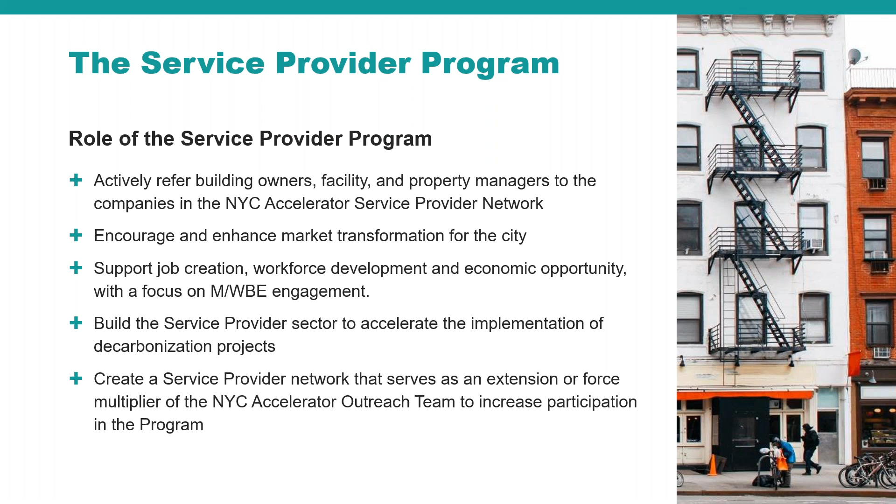One of the benefits to being a service provider with New York City Accelerator is you will get to grow your business through referrals from New York City Accelerator. As I mentioned earlier, referrals to building stakeholders are only for the service providers in our network. You'll also earn inclusion in the New York City Accelerator Service Provider Lookup Tool, which is shown here on this screen.

You'll also have access to our entire bench of account managers, expand skills, and grow your team. You'll also be invited to participate in New York City Accelerator's networking events and any trainings we hold, and we provide access to our financing and solar specialists. One of the things that isn't on this slide is we also provide our service providers with a full marketing toolkit and a financing toolkit.

So if you are a service provider and not yet part of the New York City Accelerator Service Provider Program, we would love to have you join us. Simply reach out to me. You can email me at denise@accelerator.nyc. I hold a virtual information session every Thursday at 11 a.m., and you can click on that link, or just email me again at denise@accelerator.nyc to express your interest, and I will send you a link and invite you to the virtual information session.

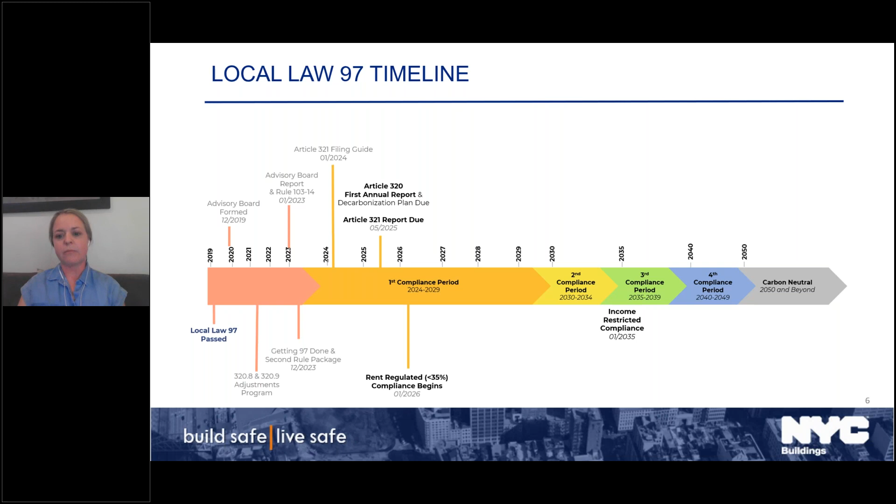So Local Law 97, like I was mentioning, is broken down into two compliance categories: Article 320 and Article 321. Article 320 is for most private sector buildings and certain affordable housing. Article 321 is for very specific types of affordable housing buildings and houses of worship. Today we're just going to talk about Article 320 and calculating the annual emissions and emission limits related to that article.

This is a little bit about the different compliance pathways for Article 320 that you see circled. These are the annual reports that need to be filed by May 1st every year, starting next year. It's approximately 34,000 buildings, and these are buildings that over time will have to get to carbon neutrality by 2050 and meet those emission limits that drop periodically every 5 years, that's the trajectory they'll have to maintain to stay in compliance.

Article 321, which we're not getting into today, that's a one-time report due next year. I think our next service provider training will focus on Article 321. I also want to mention that city buildings and NYCHA are still subject to Local Law 97 on a portfolio-wide basis. However, those buildings are not reported to DOB, and we don't have the oversight - that's with DCAS and NYCHA.

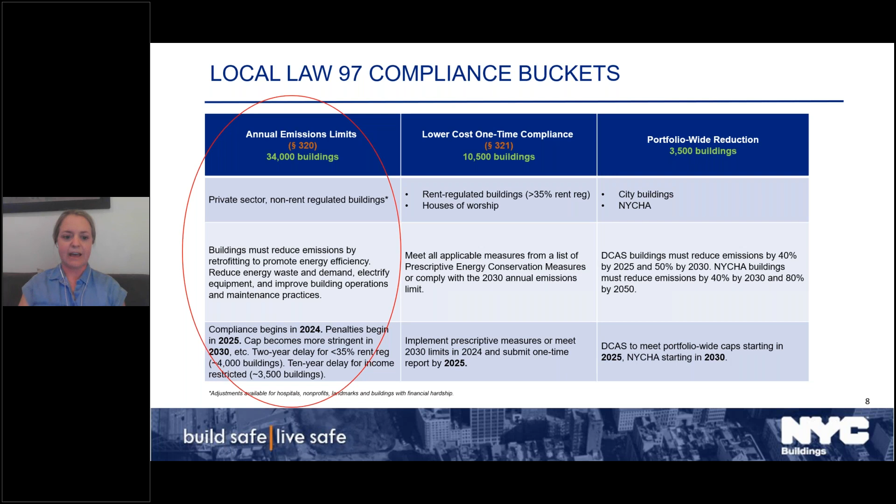I also wanted to mention that the historic sustainability laws - benchmarking, energy audits, and retro-commissioning - have been enforced on the lot level, at the BBL level. But Local Law 97, we're transitioning over to compliance on the building level, and that's important for a variety of reasons. A lot of the industry is used to reporting on the lot level, but this law is written differently, so we need to enforce it according to each building.

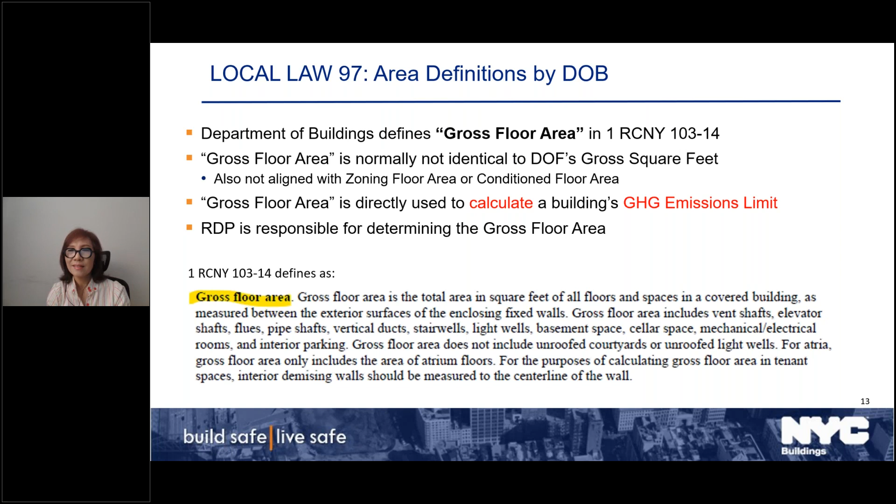So with that, I'm turning over this to... no, I have another scenario slide, sorry. Can I have the next one, please? Okay, so now let's take a look at the scenario.

So this scenario is: there are multiple buildings, actually 2 buildings, on the same tax lot, and they share energy service. By that we mean that the buildings share a meter or other point of connection to the energy supply or energy distribution system. If you look at the top diagram, 2 buildings are fed from one connection point for natural gas and also utility electricity. There may be one main meter for natural gas and some meters for electricity, but the connection point is basically the same.

In this case, on the same tax lot by the same owner, they share energy service and could submit a combined report only if building 1 and building 2 follow the same Local Law 97 compliance pathway. There was slide 9 earlier that Emily explained extensively - some buildings are subject to Article 321, and if this Article 321 building shares energy service with an Article 320 building, they cannot combine the report. Their reports have to be separate.

So it's only when building 1 and building 2 are both subject to Article 320 that they could submit a combined report. I said combined report, but the calculations still have to be at the BIN level, the building identification number level. So each individual building's energy use, their emissions over a year, and the emissions limit for a year have to be calculated separately.

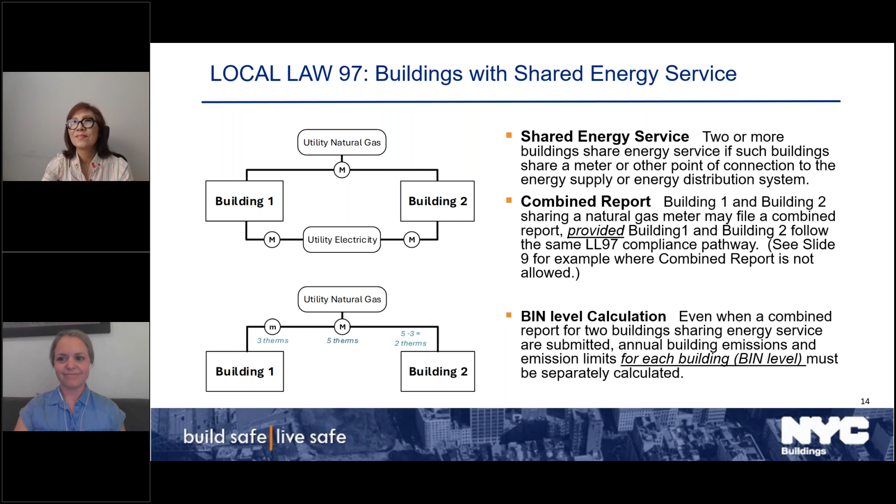Next slide. Okay, so Jean explained, we've set it up so far that I think it's understood that each building is required to generate their own emissions limit and figure out their annual GHG emissions. Again, we're talking about Article 320 buildings. So what you see on the screen are the calculations to do that, and we'll walk through each factor within these calculations so you're able to determine where that comes from.

So to determine the GHG emission limits in tons of carbon dioxide equivalent, the building will have to be broken down into Energy Star portfolio manager property types and the corresponding gross floor area of that property type. Jean explained what the definition of gross floor area is. It's not the same as Department of Finance's definition of gross square feet.

And in Rule 103-14, there's a corresponding emissions factor for each property type. So the building, when you're assessing a building, you break down each one of the property types by the gross floor area, and you multiply it by that emission factor that's either in the law or the rule. And you do that for each property type, you multiply them together, you add them up, and that's the emission limit for the building. So essentially every building will have a unique emissions limit because each building likely will not have the same gross floor area of each property type. So that's what we'll be seeing on the emission limit side.

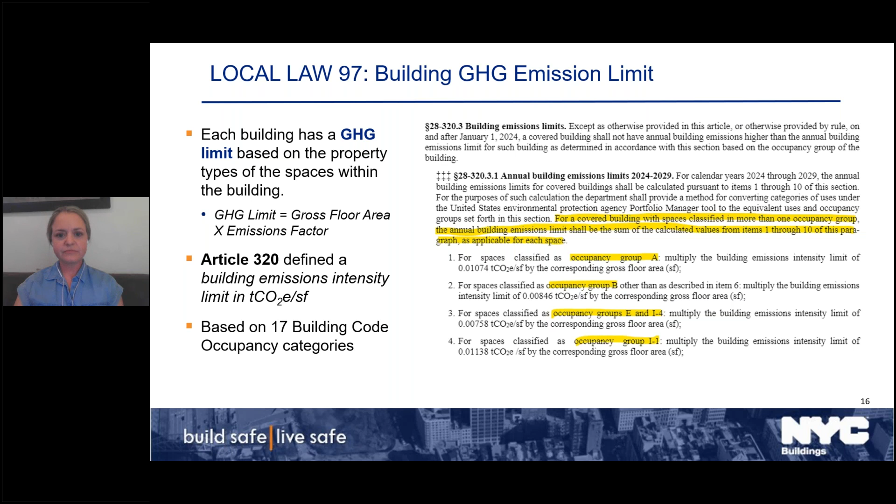In Rule 103-14, you'll see we have a list of Energy Star Portfolio Manager property types and the corresponding emissions factor for the different compliance years. Highlighted here is the first compliance period, years 2024 to 2029, with the associated emissions factors for each property type.

There are 62 Energy Star Portfolio Manager property types that correspond to the energy use intensity within the building. So when you're going through the building and breaking out the areas, it's important to think about the different energy use profiles of each space and assign them accordingly.

We'll go through an example later in this presentation. This is where it's important for the registered design professional doing this reporting to think about which property types make sense in a building and when they need to be specifically broken out.

If you're used to benchmarking reporting, benchmarking really wants you to classify an entire building—there are rules around when you classify an entire building under one single property type. Sometimes you can do two property types, but with Local Law 97, we're looking at a more granular approach, so it won't necessarily align with what's been reported for benchmarking.

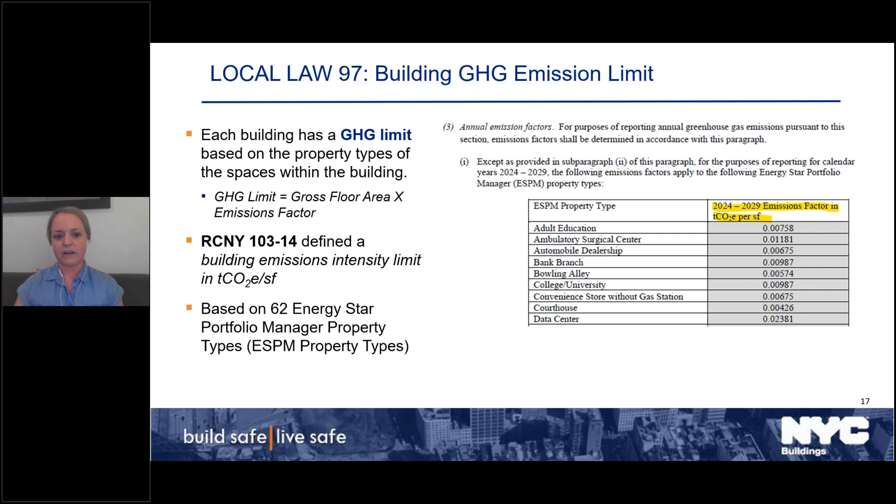If you're interested in how we did the research and the methodology for converting building occupancy categories into Energy Star Portfolio Manager property types, you can find a report on our website—there's a link under the image in these slides. You can link directly to that report. There were a lot of outside stakeholders involved; it was a very scientific methodology used to come up with those limits, and all of it was implemented in the first rule package effective January 2023.

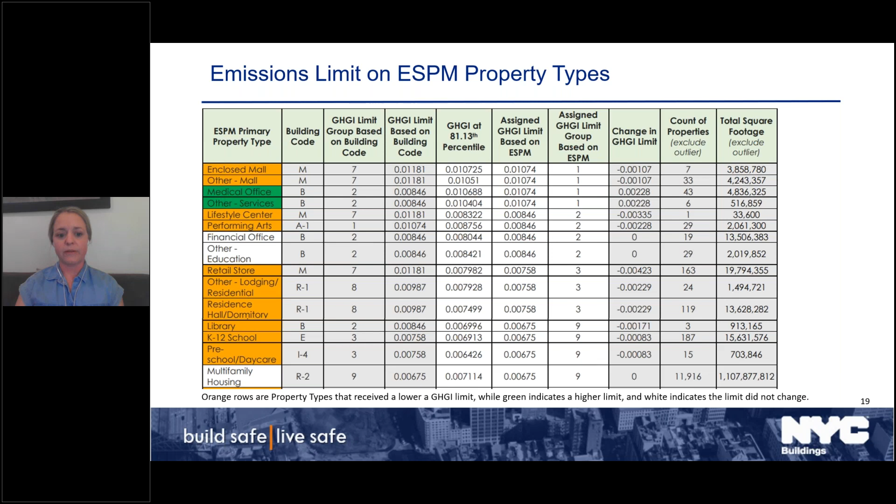So what do you do when we have two options—Article 320 building code occupancy categories and the ESPM property types? How do you know which one to use? We published a service notice in February 2023 that explains how you should approach it.

Basically, what we're highlighting is that in 103-14, you must use the ESPM property type limits to determine the building's limit rather than the occupancy groups. But there is one caveat.

The caveat is that most Energy Star Portfolio Manager property types, after the transition, have higher limits, meaning they're more lenient under this ESPM approach than the building code occupancy category. However, some buildings have lower limits, meaning they have a little more difficulty achieving compliance.

So only in cases where the emission limit was lowered under the Energy Star Portfolio Manager property type, buildings have the option to choose between the original law's building code occupancy category limits or the ESPM property limits. They have that choice only for the first two years. Starting with calendar year 2026, with reports due in 2027, all buildings must use the Energy Star Portfolio Manager coefficients.

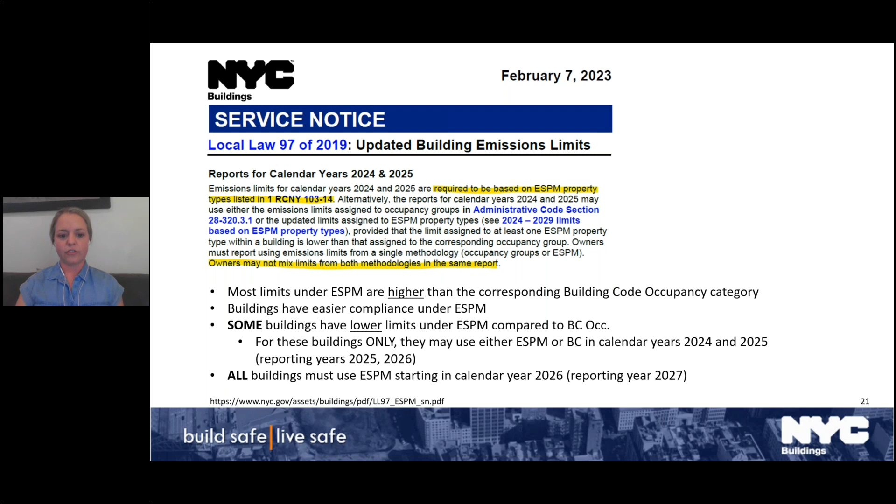This slide is just reiterating that starting calendar year 2026, reporting year 2027, all buildings must go with the ESPM property types that are listed in Rule 103-14.

I'm going to pass it off to Jean now to walk us through some examples. Thanks, Emily. Next slide, please.

So what does this mean? The metric tons of carbon dioxide equivalent - for instance, item number 1, utility electricity: 1 kilowatt hour of electricity consumption results in 0.000288962 metric tons of carbon dioxide equivalent emission. So that's what it means.

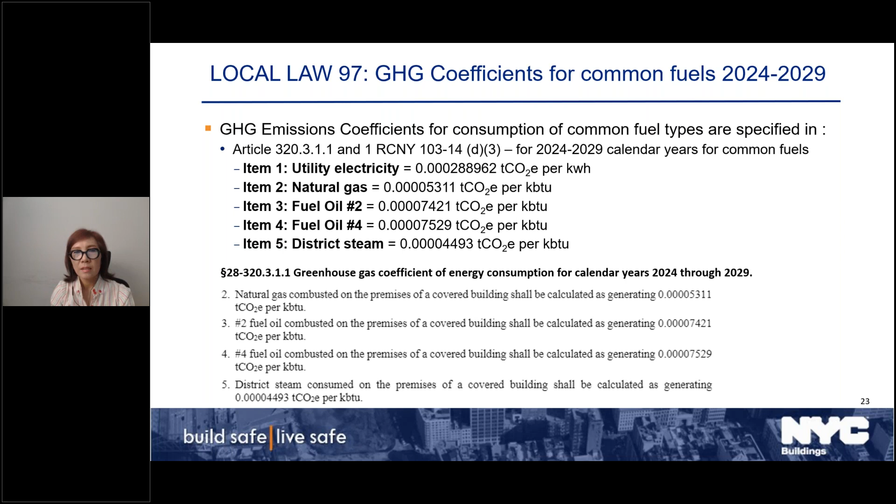Can we have a next slide, please? Emily has gone over this, so I will be brief. Buildings' annual greenhouse gas emission is basically the annual fuel use at the end of the year times the emissions coefficient of the fuel type. They have to add them all up per different fuel type, and that combined greenhouse gas emission is the building's annual greenhouse gas emissions.

The compliance period has started this year, so it's already end of June - we are currently 6 months into the first calendar year of Local Law 97. Local Law 84 benchmarking has the same covered building criteria of buildings over 25,000 square feet, whose annual fuel and water use have already been reported. So we are using the same annual fuel use data for Local Law 97. Can we have a next slide, please?

This is an example of what Emily explained and what I just talked about with the emissions coefficient. Let's take a look. This example is a multifamily commercial mixed-use building of 45,000 gross floor area - not gross square feet from DOF, it's gross floor area. To calculate this building's annual emission at the end of 2024, we look at their energy bill.

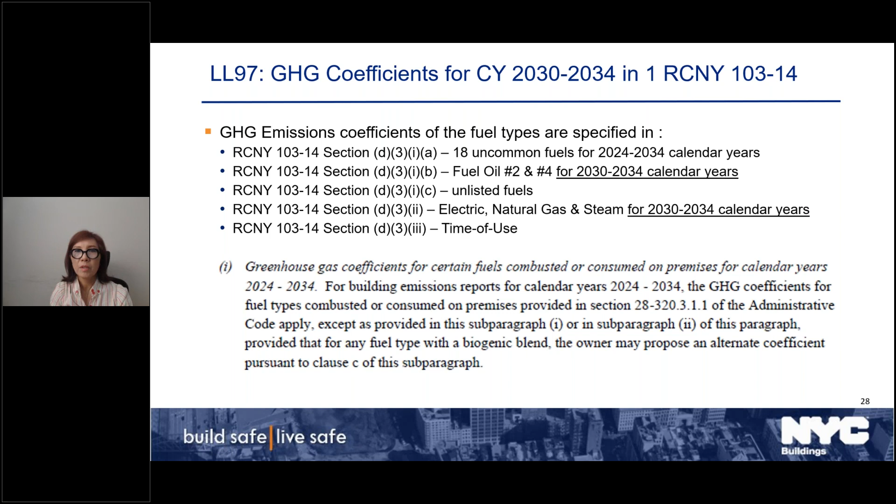Next slide, please. So to summarize, 70% of New York City electricity will be from renewable energy sources by 2030. And New York State aims to achieve 100% renewable electricity by 2040. And then Con Ed has its greenhouse gas reduction goals for district steam.

One thing that I forgot to mention, so there are things like offsite solar, community solar, energy storage, biofuels, and cogen systems. We have future rulemaking on the way right now, so be on the lookout for that. About this table, Emily probably will explain further with the chart in the next slide. Thank you.

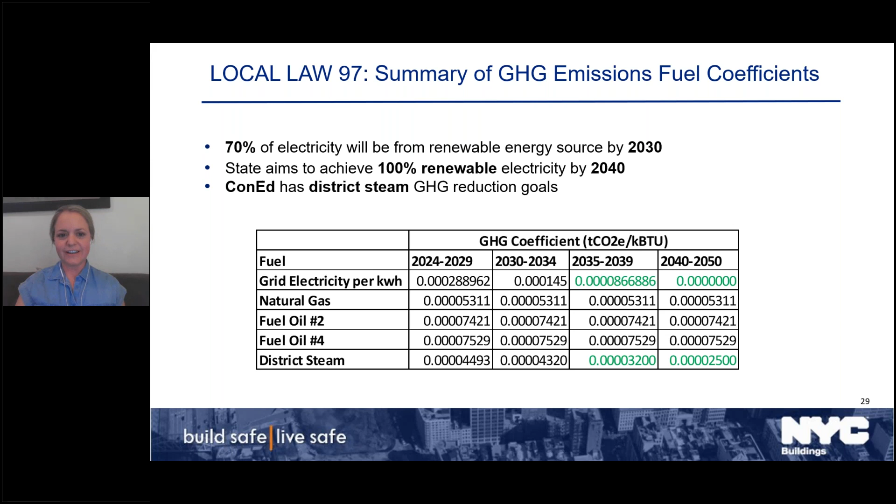So that just ties in and shows you a different visual of why buildings that just continue to run on natural gas or fuel oil won't be able to reach the greenhouse gas reduction goals over time. They may be okay doing that in the first or second compliance period cycle, but once we get a little further and the emission limits really drop, it's going to be really difficult to achieve compliance without also shifting over to renewable energy, including the grid electricity that is anticipated to be renewable.

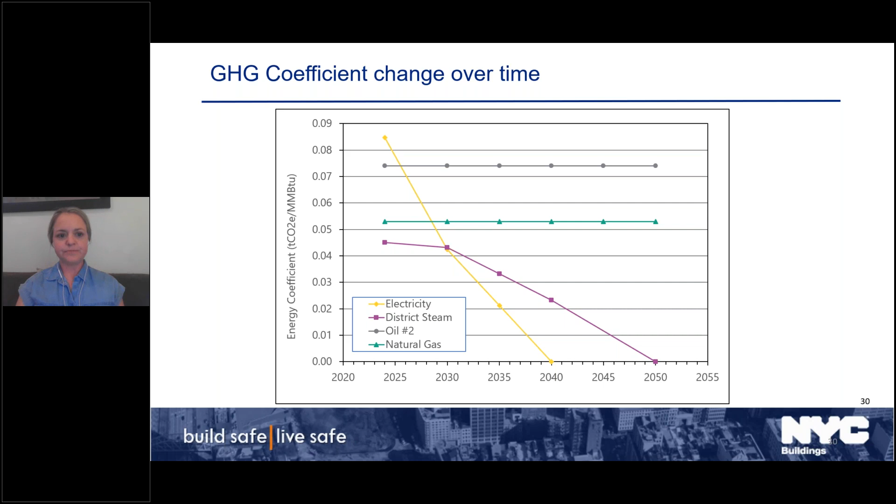Next slide. And this is just a summary of everything that we covered, covering how you calculate the formulas for calculating the annual emissions, the GHG emission limits, and again, this is per building, not per lot. So that shift is happening in compliance. Each building needs to be considered, not each BBL. And like we mentioned earlier, it's important to go through that exercise and determine which buildings on the BBL are subject to different compliance pathways. Again, compliance is met when the annual emissions is less than or equal to the limit.

And just strategies for getting there. We didn't go really into strategies, but just at a high level, obviously, if you reduce your fuel use, meaning you have more energy efficiency savings in your building, that's going to reduce emissions.

If you reduce your fuel coefficient, you'll reduce your emissions. Going back to that graph, oil number 2 is the highest, natural gas is a little lower, but electricity and district steam really decrease over time. As we see new renewables enter the grid with offshore wind, hydropower, and a lot of solar coming online, that electricity coefficient is going to drop significantly. So starting in 2030, in that second compliance cycle, electricity will have the lowest coefficient.